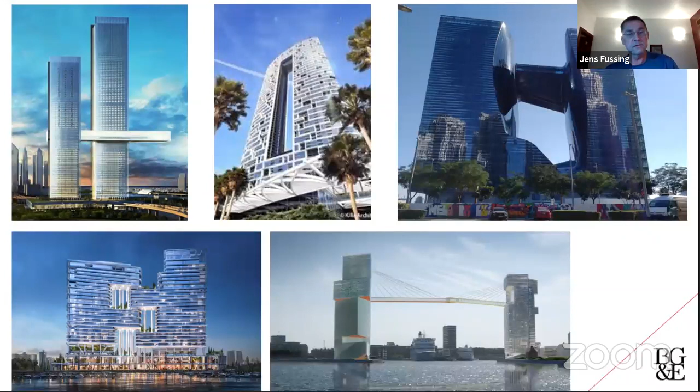So these columns here are 30 meters tall, and in the beginning they were like 500 millimeters thick, so of course that didn't work either. We'll come back to that.

So let's see what the usage actually is. Now we see it from the other side. The taller portion is the hotel apartment, and the lower portion is the hotel section of the tower. If you notice, the floor plates do not line up - the floor plate in one building does not line up with the floor plate in the other building, only at this level here at the roof.

Underneath here there's two common basements, and we have all the common podium structure in the bottom. There's a ballroom over here, and you can see that one, two columns are transferred out - we'll come back to that in a minute and why that is. Then up top here you have a pool and a sky bar.

But one thing which was important for the architect was these three things, which were very holy: the voids and the way the voids look and why they were there - we'll come back to that with some photos later on - the columns being expressed, and then also the facades, the way they look, are designed, and the way they shade. Those three things were extremely important to understand what was going on architecturally.

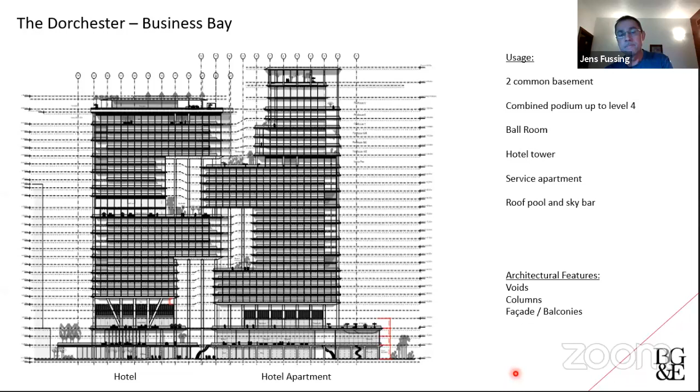So if we just look at it, the hotel apartment is 136 meters tall, and the hotel itself is 125 meters tall. So that's the proportions of the whole building. And the few transfers which are there are done with V-shaped columns and raking columns like that, and we'll come back to that also - there's a few slides on how we did that.

So this one here is the layout of the building. You can see that it has a kink - it follows around the same shape as the harbor front.

If we look over here, you can see the ballroom. And if you follow the tower footprint, you'll see that - oops - where are these two columns? They're gone. And then of course the floor plate goes back, the footprint goes back here again. This is one of the extreme challenges, to move two columns in the bottom of a tower footprint.

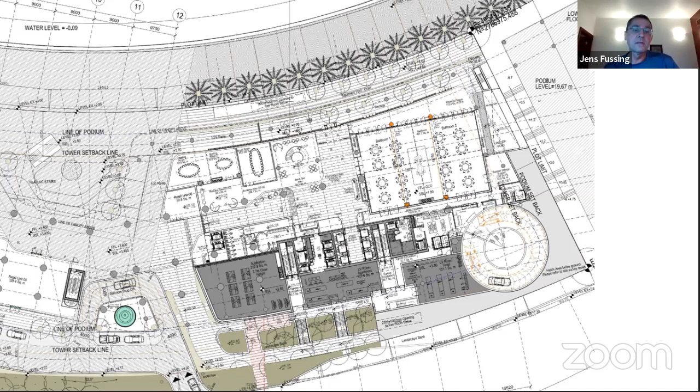And then if we go back a little to the middle here, again an architectural and structural challenge is that you have drop-off zones. All these columns here go straight from foundation to top - they cannot be touched. It's holy, it's... what should we say... it's an architectural impression which has to be maintained like that.

This little stairwell, we'll come back to that also, why it is there. Architecturally, it's in the way. Structurally, it's extremely good to have it here. Again, you can see the footprint of all these round columns - those are the footprint of the tower itself.

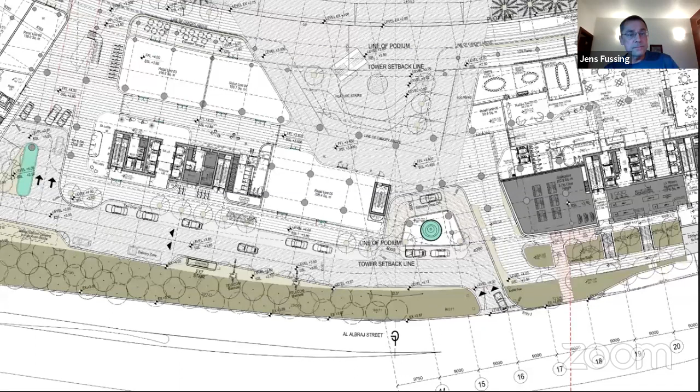Let's go back again. So those are sort of the challenges we can say. How do you make sure that all these columns can go all the way up and only sit in the division between the hotel rooms when you have a shape like this, with all these things going on here in the bottom - drop off from one side, drop off from the other side, a stairwell here, a ballroom over here. These are sort of the extreme challenges we have.

But you can also see how open it actually is here for wind to flow through. There's a lot of openness in all this building here in the bottom. This is actually tower columns you have over here, so wind can actually flow through all this area. And as I said, we'll come back to that. The building itself has a funnel shape. This is the predominant wind direction because the Gulf is out that way, and that's where the strong winds come.

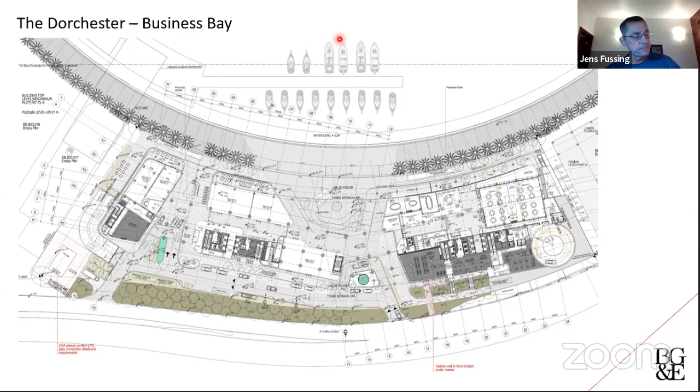If we look a bit at the architectural floor plans, this is just one of them. Here you can see this is one void, and then you have columns in the middle, and it's all rounded, so we have nice round edges in the voids.

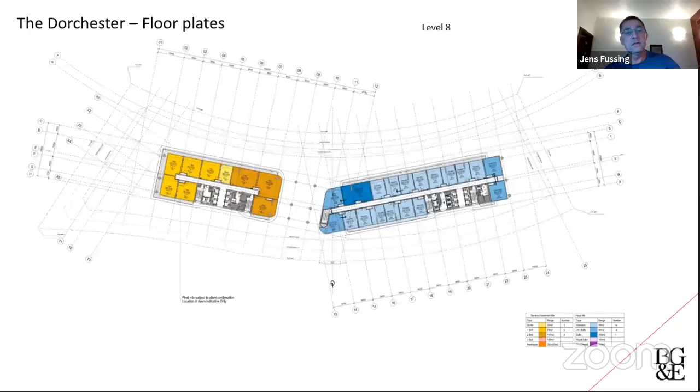But it's of course a huge puzzle, because when you look at how everything is laid out in the beginning, there are requirements for room sizes, requirements for how many rooms you're going to have, and all the columns need to line up. That's the puzzle. You can see how it shifts the other way around, so now we have the void on the other side of the building, and still the same columns must go straight up and down. It's not like a sky bridge, it is like a building, but with no facades where we have the voids. That's the way it should be looked at.

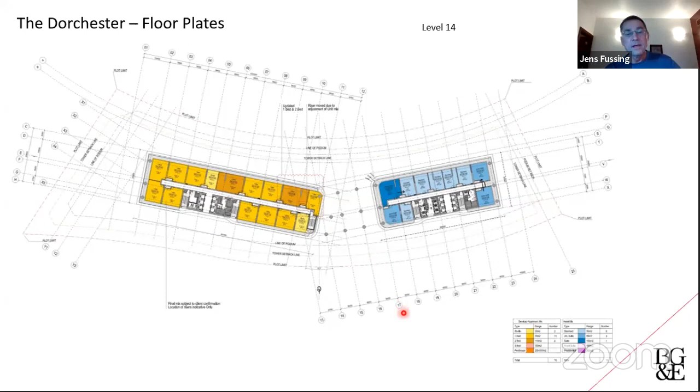And of course, in the beginning of the concept, the cores are not that big. The cores are smaller, and they grow and they grow until you find all the right stairwell sizes, MEP, elevator number, all that stuff. So that's part of the process.

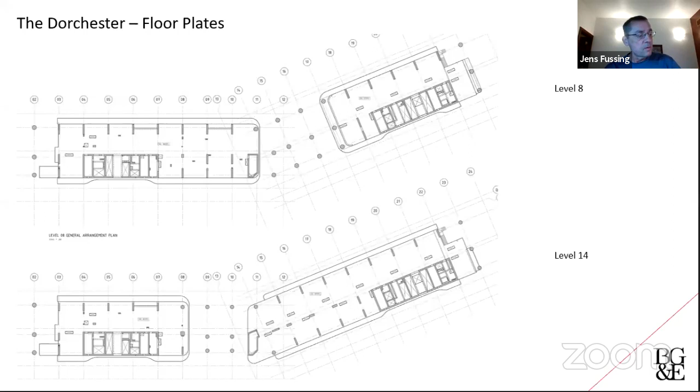I'll just touch a bit on these facades. Originally, Foster and Partners wanted to do these facades and balconies prefabricated, and I agree with that opinion completely, and I'll come back to why. If you look at it, you have fins which are all the same, balconies which are all the same, facades which are all the same. An insane amount of repetition factor. So much industrialization is in this view here.

But no. When decisions are run by commercial people and not builders - when I say commercial people, I mean UAE builders - they wanted to do it traditionally, where they cast the slab out, put insulation, put membrane, clad all that stuff, and then erect your facade, and then put your balustrade on afterwards.

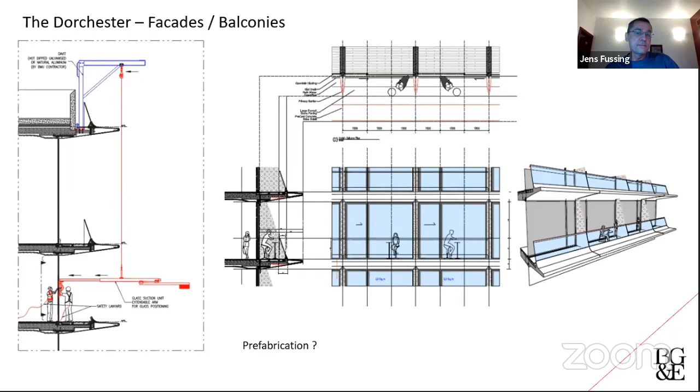I just want to show some ideas. I mean, the wheel is invented already, right? You have systems where you have fully thermal broken facade and balcony systems, where you can make a balcony which is even more slim because it doesn't have all that bulk, since now you need to build in membranes and insulation and all that stuff. The wheel is already invented. It's out there, it's not rocket science.

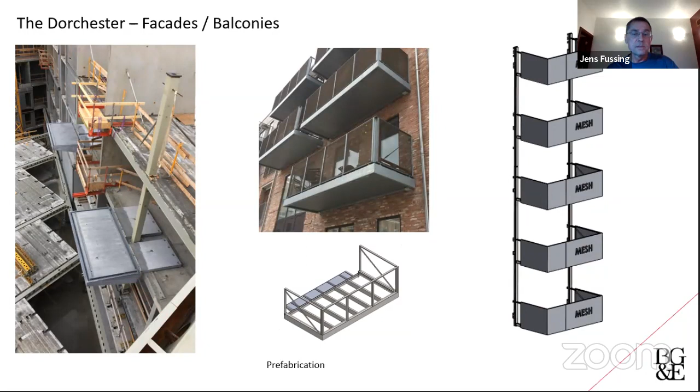This is from North Europe, and it's a fully thermal broken type of balcony system. Here's some other systems where you can see the brackets are ready to receive the balconies, and here there's also a thermal break behind. When these balconies are erected afterwards, there's no membranes, there's no insulation - that whole work process, you don't need to do it. Whereas the one we have chosen now is very slow to build.

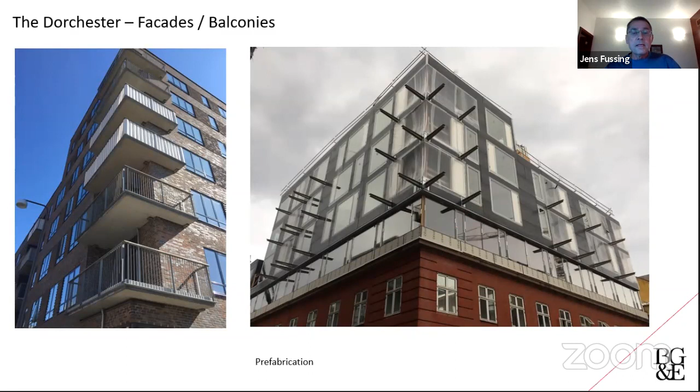So I want to keep touching on this. This is a project we've been involved with for the last 3 years, where we've been helping a developer in Denmark, together with BIG, to develop a tower project which goes from 20 meters up to 100 meters. It's mostly the structure, but also the facades and the balconies.

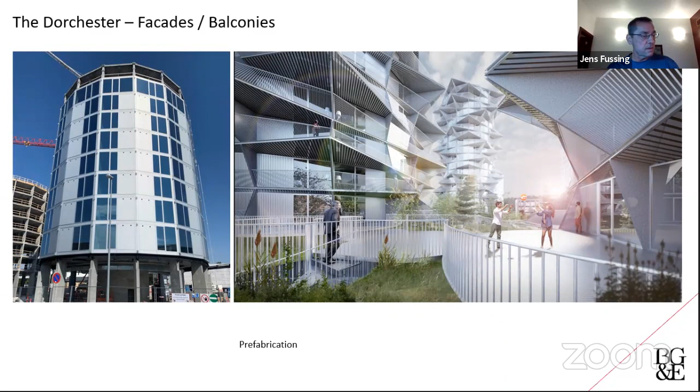The way it should have been done: you have a structural system, then your curtain wall, then your balconies afterwards. That's how it should have been done. And of course, no thermal bridges either. When people tell me something is impossible, look here - what are they saying, is it not impossible? Possible.

You have the same thing here - the fins, which we had on the Fosters, and a raking balustrade. All of that is done here. On these towers we only have 4 different types of balconies. Each facade takes 2 days to erect - there's 16 numbers, it takes 2 days. Each balcony takes 2 days to erect per floor.

If you look at it out there right now, it takes an insane amount of time because you have cast-in steel, post-tension slabs. You must put insulation, membrane, your GRC cladding, then put your facade in from outside with a counterweight, then put your GRC on your balustrade, and so on, and put the lights.

So we still have a lot of improvement to do here in UAE, and this is why it's fun to do these talks, because it's always about going back and forth. The structural system on these towers is actually ideas I have from here, from Dubai. So it's always fun when you can mix these ideas.

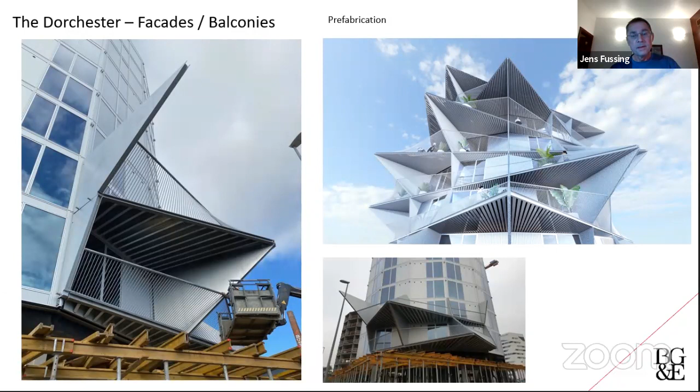But to me, this project and the Dorchester project I'm showing here have so many similarities when it comes to facades and balconies. And the wheel is invented - we don't have to build slow anymore when we do balconies and continue the floor plates out.

Okay, now to the fun part, all the structures. This is not to be sarcastic, but I call it the Bumble Bee because it shouldn't fly. Of course you can always make a building fly, but it's meant in a positive way, because we have challenged so many engineering principles on this tower, first principles. For example, the structural system is a hybrid system.

We'll come back to that. First of all, the floor plates do not line up. Usually with diaphragms we'd like the floor plates to meet each other at some locations - no, they don't do that here. The hotel rooms have a column grid of 9 by 11 meters. We like to have 8 by 8 because then we can go down to a 200 to 220 millimeter PT slab. But 9 by 11 makes it chunky. It's the first principles which has a cost.

The two towers are linked with a stairwell in the middle here - I'll come back and talk a lot about that one. So the only thing making these two towers connect with each other is the stairwell in the middle, which creates the diaphragm action between the two towers. Have you ever seen that before?

The cores are eccentric - we don't like eccentric cores, right? We want a lot of gravity load on the cores. The columns change shape up through the building, from round to blade and back to round. There are huge transfers at the bottom of the tower, where we transfer 2 columns out. Why could that ballroom not have been shifted out 10 meters and avoided all that?

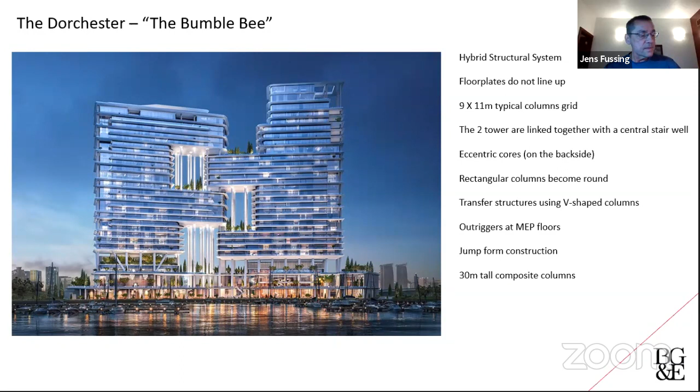So yeah, I'll just very quickly here, you can see how the cores are eccentric. If you drive on the Al Khail side, you can see the back side of the core. And of course, the reason why the cores are eccentric is because everything is about the views. There's nothing to view that way, other than the desert. So they want all the people to live in front of the bay so they can view the bay and Burj Khalifa.

This one is the stairwell in the middle linking the two bridges together, two buildings together. But I'll come back to that one. You can also see here the round column becoming a blade column, becoming a round column up through the building, and they're all over each other, all the way up to the top, because that was the architectural intent from the beginning. You can also notice that the way that corner column is taken out is actually a transfer the other way. So there's transfers in two directions over this ballroom here.

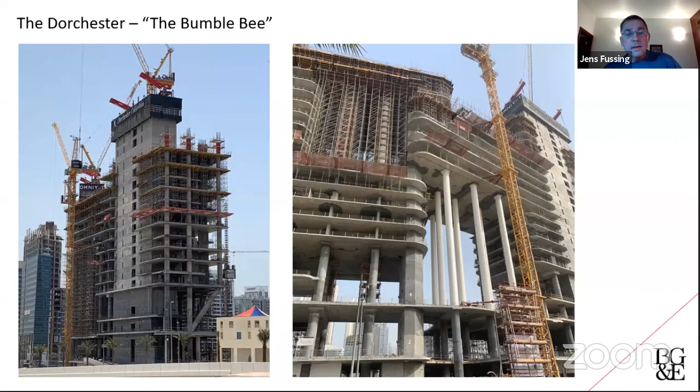If we then just look quickly here at the structural system itself, it's the usual Dubai method that we take everything which is there structurally, and it will work for lateral stability. So in this case here, it's of course the core wall system with link beams and frame action between floors and cores and columns. And we also have some outrigger levels up through the building.

I'll come back to that one in a little while. So yeah, and again, the floor plates do not line up, but it's still one building, everything. We were also discussing about that in the beginning, if we should make some expansion joints and make a little steel bridge, which is just resting on the other one. But that was shot down because of this column theme of the whole building.

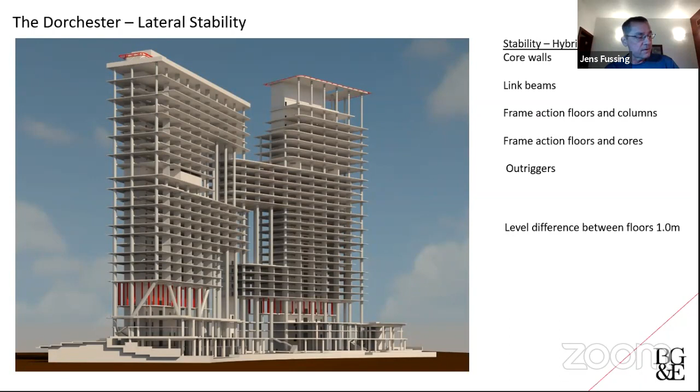So if we look at it from a modeling point of view, or more sophisticated here, this is how it is. I mean, the cores and the columns and the beams and the floor plates and the beams and the link beams in the core walls itself.

Of course, we've done many ETABS models before we found out how it worked. Just a few, again, one of these funny things where you can see how the floor plates, they change from void to void. So this is a void down at 11.7, and this is another void higher up through the building. But again, that column sits on that column, as we come further down.

So all the time, cost consultant will come and ask me, what can we do to save on concrete? Yeah, you can shorten the span, that's what you can do about that. I don't have a magic wand how to get over that.

So it's about getting, if you want cost, if the cores were also not that long. But surprisingly, when we came through the final versions here, actually the two first mode shapes are in the Y direction. The third is in the X direction, and torsion is actually the fourth mode shape. So this is totally a textbook example, but it's just against one's intuition, because you feel like it should be a little bit more susceptible for torsion. I thought it was going to be torsion which was going to dominate this building here, but it wasn't. So that's always one of these fun things when you sit and compare your initial thoughts.

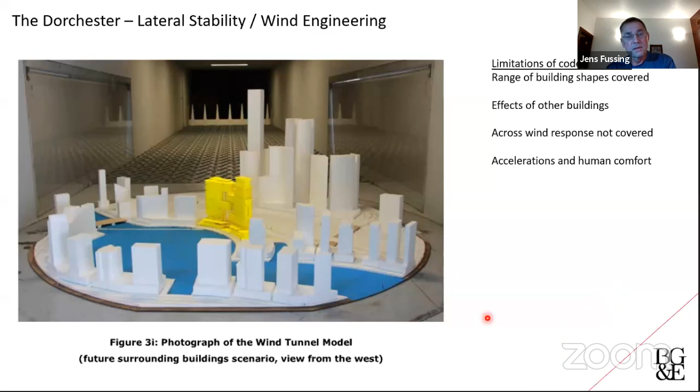So of course we did everything. I mean, the normal wind tunnel study with loads and zone mapping for the facades, and also the accelerations and local wind environment, all that stuff was part of the wind engineering package. And the way the wind loads were reported was in 3 different coordinates, which we then could enter into ETABS afterwards, for 36 different wind directions.

If you remember your wind engineering from first principles, you'll remember that if you have a straight up and down building, the upper third of the wind will fly over and around the top. The other two-thirds will have to go down to the bottom where it becomes turbulence and has to crawl all the way around the building. But because we've opened up so much area here in the bottom, up through the building, and rounded the corners...

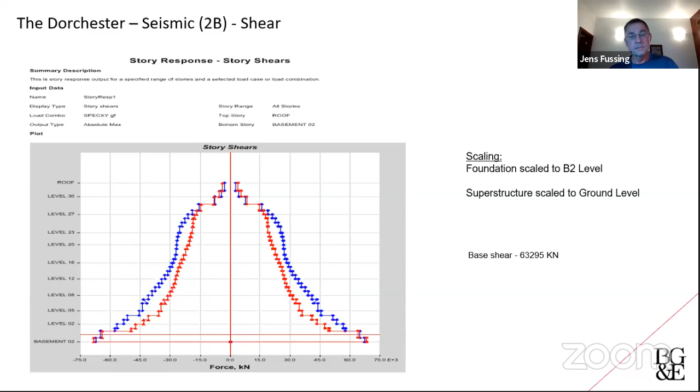If you look at the seismic, there are tons of slides, but the overturning moment is enormous. And if we take a look at the drifts, they also still comply with code requirements.

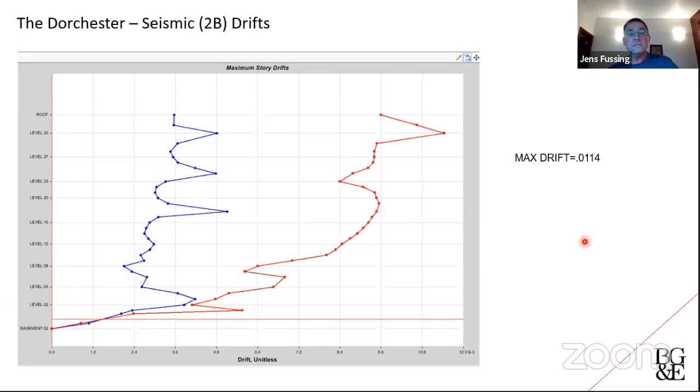Now I'll shift the subject a little bit. Sorry, not yet - next time.

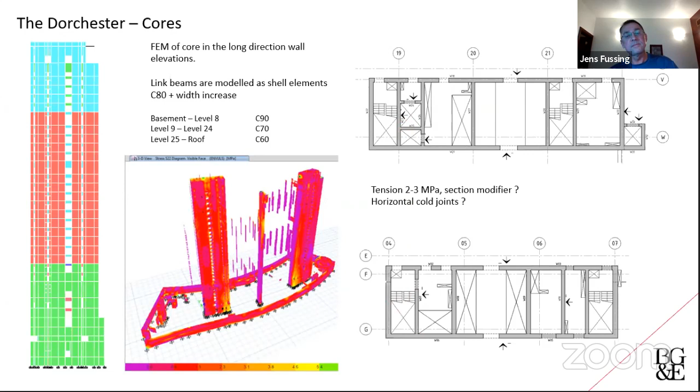Reflecting on this, when I come back to the previous models, to how it is now, and the torsion - if you imagine you have two buildings with two different frequencies, of course now it has to have one frequency, but you can imagine there are some internal forces trying to go each other's way. The only explanation I can find for why it is like this is because the core walls are so long in the long direction, so it's actually very, very stiff in the long direction because of the core walls - they are also so long. Because this looks scary, right? You think about one slab going one direction, one slab going the other direction, what's going to happen right here? But it was actually just, when we designed these core walls straight out of ETABS, there were no surprises at all.

A few - so where the core is visible, it has this shape here. And at the floors, if you imagine you come up to the stair and then you have a corridor down here to the hotel room, there was a little bit of reconfiguration of the stairs in this area here.

So why is this one here important? There's two interesting things. First of all, it acts as a link between the two buildings structurally. But if you notice the drawing before where we had the drop-off zone, Foster and Partners actually wanted to transfer this core wall out at level 4 and say it stops there, doesn't go down to Mother Earth. And DM, or Civil Defense, I don't know who it was, would not allow it. So structurally, of course, it's logical that it has to go down to the raft, and it's good because it just makes sense.

They actually wanted to transfer it out. It's not impossible to transfer it out, you can do it. But the reason why it looks like it does is that there was a stairwell here, and DM said all stairwells must be concrete and go down in one straight line to the raft and up to the roof. That's why it looks as it does. As a structural engineer, I'm happy we have this one because it ties the whole thing together, and it would also be a nightmare to transfer that out.

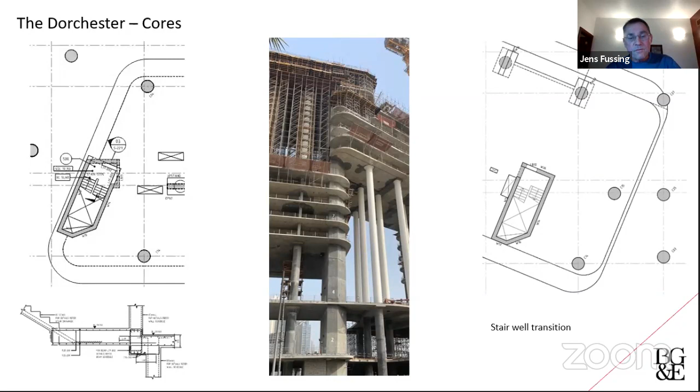If we take a look at the columns, this is one of the views, this is the hotel side, where you have the ballroom underneath these raking columns. If you look at the ETABS model, you can see that the columns' center lines line up until they meet a frame element.

This, of course, is an architectural nightmare because an architect would like all the front faces to be out at the facade line. The reason for this was that DM said an offset in a center line is a transfer structure, and DM would only allow one transfer in one load path. So you cannot have a transfer on a transfer on a transfer. They would not allow that.

For example, if we take a look at that level here, it's okay. Here we could play around, so they would allow one level where we cut off and move the column faces out to the facade, but the rest has to go straight up. So first we had to make sure all the columns were in the right location with the ballroom and the drop-off level, but then we'd also have to look at it in the building in that direction afterwards.

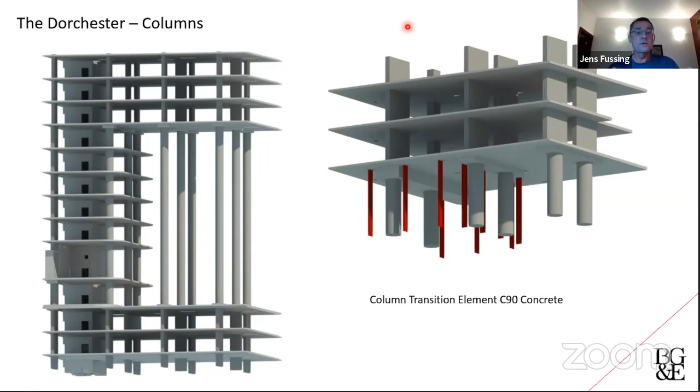Back in the day when we were doing a lot of projects in Index and residences and around here, imagine you have one blade column and another blade column on top, so two blade columns, but they change direction. You can make a transition element or a huge core, call it whatever you want. The way we convinced DM to do these transitions was that every time we have a change between a blade and a round shape, we introduce these transition elements.

You can see them here, to catch the load from one geometrical size into another. You can also see them here. We'll also show some photos now. So the agreement was that center lines must line up until the first time you have a transfer, and every time you have either a transfer or a geometrical change, we have a transition element. That was sort of the agreement, and why the building looks as it does right now.

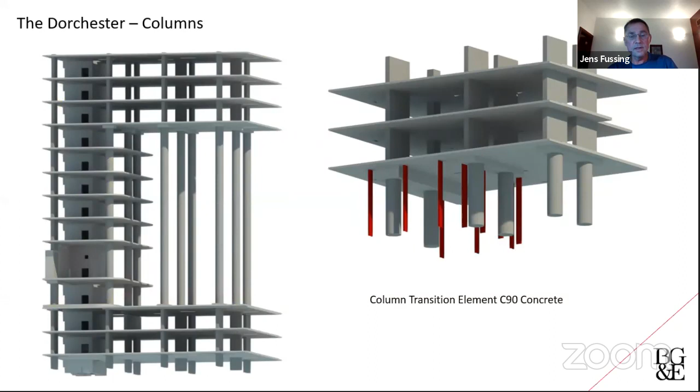For example, one transition element, you see this one here: the round blade column sits perfectly clean over the blade column underneath, and there's a transition element which makes sure all the forces get from one geometrical size into the next. On this plan here, this is another case where the columns are shifted out, so the outer face of the circular column matches with the blade, and that's now a transfer structure. All of these transfer elements, transition elements, all have an omega factor on top of that. And because we have high strength columns, the transition element is the same concrete strength as the column.

And an omega factor on everything. There's a lot of checks you have to do for these. You have to check the bearings as a simplified strut and tie model. We have to do the mushrooming, which is the concrete strength, and of course the omega factor. So that's the agreement we had with both third-party review and also DM.

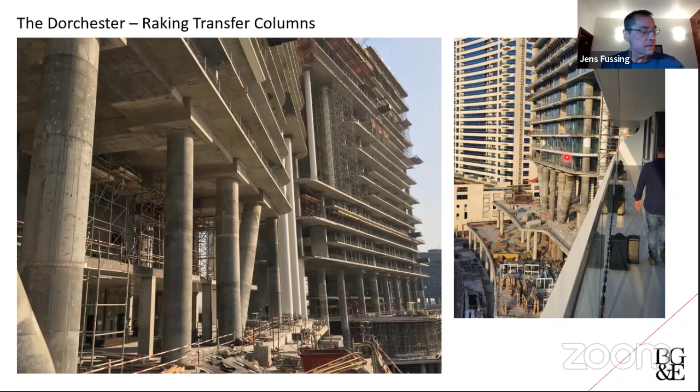Here you actually have a bit of the facade being constructed. I think this is the trial room or whatever they call it. And then we've also been through the construction sequence analysis, and it does have a little stomach there in the middle, trying to bend a little bit out, which is also as it should be.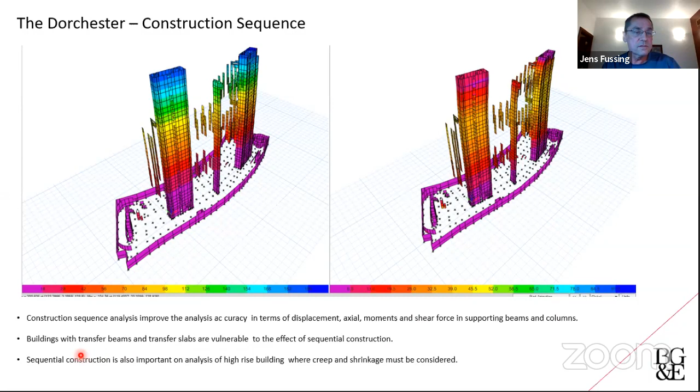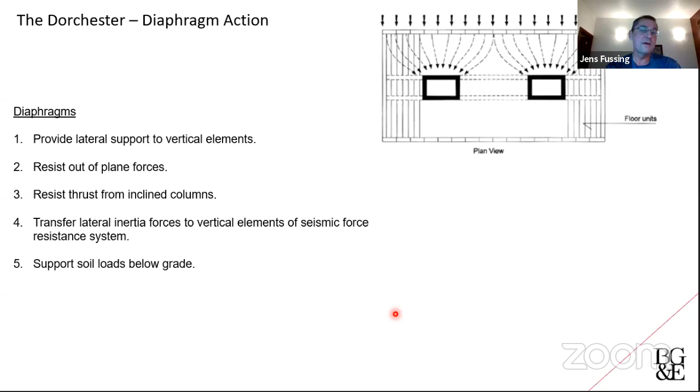I just want to touch a little bit. The last topic here is about diaphragm action, and I think one of the big learnings here is that it's logical that when you have columns which are raking, for example, that you will have forces in your diaphragm. So when you sit with your first principles and you design these things, you know that.

But the thing is, how do you practically design with the tools we have today? How do you remember to take into account all these forces here? Because usually a lot of these floors will be done by a PT designer. So the PT software and SAFE does not know how to take into account the lateral loads. So it's all about establishing all those principles about who designs the diaphragm action, who designs the ties.

It's a little bit the same as when we have temperature and gravity loads. I mean, who tells the PT designer what extra reinforcement is to be put where, and that's where you really need to concentrate to find out, because some of these forces are very, very big, and it seems counterintuitive that you have tension forces and then you have a PT slab afterwards.

I mean, so you really need to think about what happens in diaphragm action when you have raking columns, and how do you tie the forces back to the superstructure. So anyway, this is just one of the learnings and findings, that there can be some very, very significant loads which can occur there.

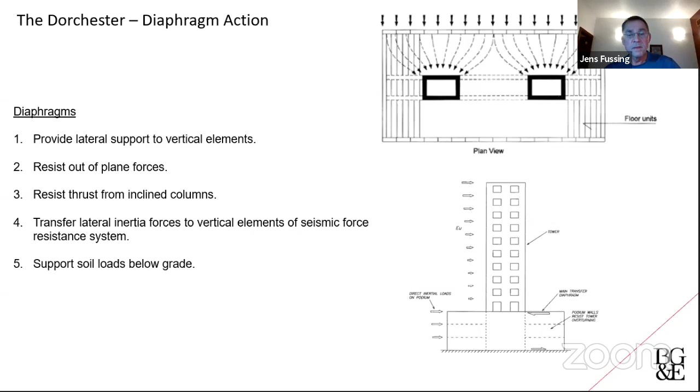So January 2020, when everything before the Corona crisis, there was going to be all these seminars and CTBUH and whatever. I actually submitted this project here, and the one I showed you before with these balconies, I submitted those to CTBUH, to the one in Singapore, as possible presentations. And they came back to me and said both of the projects were too ordinary, they were too boring.

And afterwards, they have changed their mind, because now the whole Corona crisis has turned the world upside down. So they have asked us to write an article about the one I showed before with the building system, the facade and the balconies, and that will actually come in one of the next CTBUH journals. It's a 4,000 word article with pictures and illustrations.

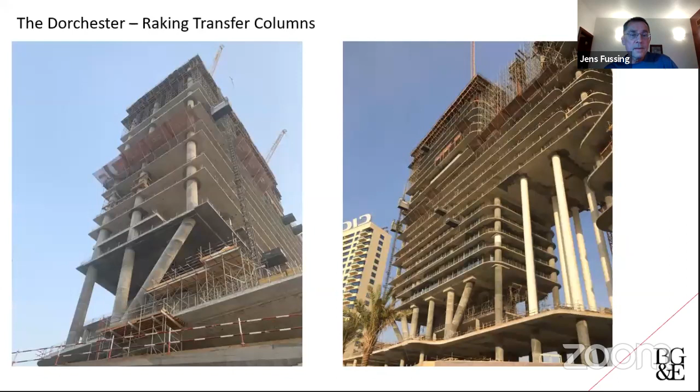Yes, I'll just find that. Just a minute. So the way it works is that, see, this is the one. For example, here, this is a blade column sitting on a round column. So here you have a rectangular shape, and here you have a round shape. So that means, it's like a two-dimensional truss which you need to generate from one shape to the other shape.

And you can do that manually, and find out what happens. But usually you can also compare it, if you did that upside down, then you can compare it to a corbel, right? So you'll get tension in this bottom layer here, because you're trying to squeeze out one geometrical shape into another shape. So the primitive answer is it's just like a corbel, but it's in two dimensions and it's from blades to round, right? So if you imagine you have two blades, it's a lot easier to say, okay, how do I get those forces from one shape to the other? But because it's round, you have to model that to see how the forces come around. And then you have the thing with the bearing, and when you start looking at bearing you have this A1 and A2 stuff and all that, and get into all these things. But the philosophy is that you need to draw a line from here out to there, all the way around, and see how that cone shapes, whether there is enough compression strength, and what outer forces do we then get because of that.

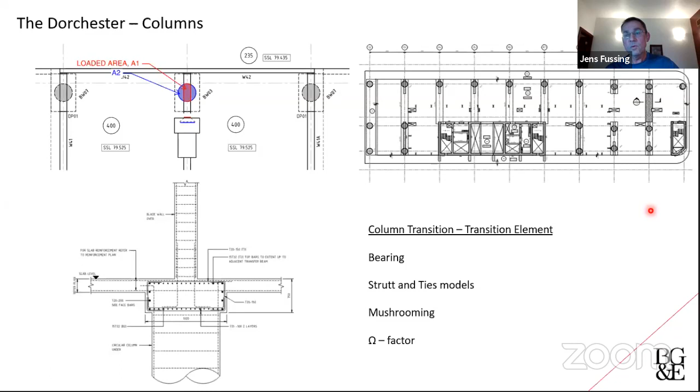It's a bit of a long question, but I'll put it short. A question from Krishna Prasad Menon, most probably from Kuwait: in the first instance, you thought it was a torsional mode, but it's not. What is your thought about that?

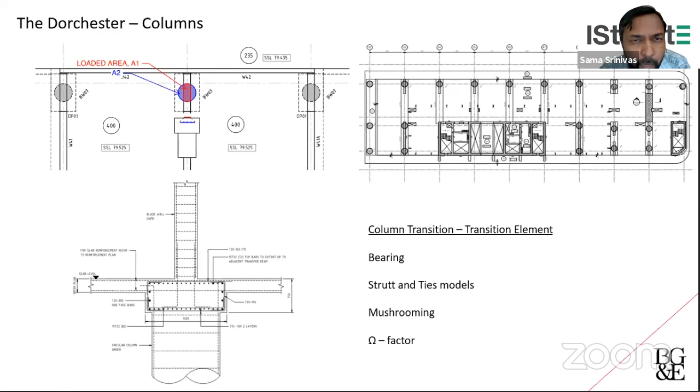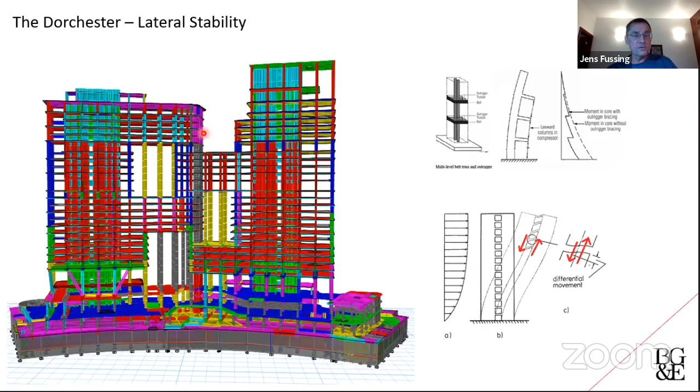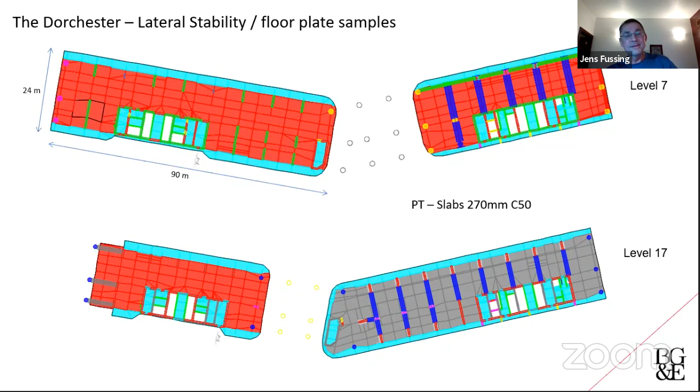This is because in the beginning I'm also mixing up the mode shapes - the first two are Y, X, and the last is torsion. When you look at the building intuitively, it looks very weak, so you think torsion will govern. I thought it would be torsion, but the reason it's not is because these cores are so long - it's a very, very long core wall. I don't know what the aspect ratio is, but it is very, very stiff in these directions. I was also surprised that torsion was not governing in the end. Good question - you have a big core, as you said, correct.

I don't think there's anything with load path, but here's the thing - if we look at this one here, when it comes to the cost consultant, the cost consultant is right. It's possible to squeeze this, it's a pragmatic view, so the cost consultant is correct. This is the optimum size of concrete and reinforcement, and he can take his spreadsheet to his boss and say he has optimized this substructure. But to me that is called sub-optimization. He's forgetting the big picture, because if you sub-optimize concrete and hurt processes, blinding levels, backfilling, waterproofing, risk and time, and you're not able to offset that, are you then a good cost consultant?

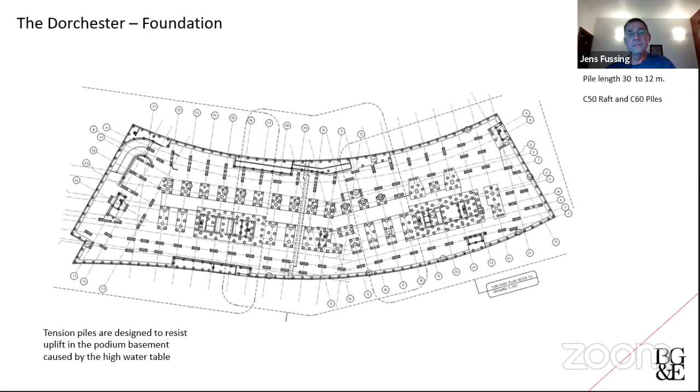It's the same thing with outriggers - it's a principal discussion. Sub-optimization always has a bad effect on other trades. That was my point. So it's actually the other way around - he has saved money here if you only look at concrete and reinforcement, yes he's correct, he optimized it. But I don't agree with that way of thinking from a big picture perspective.

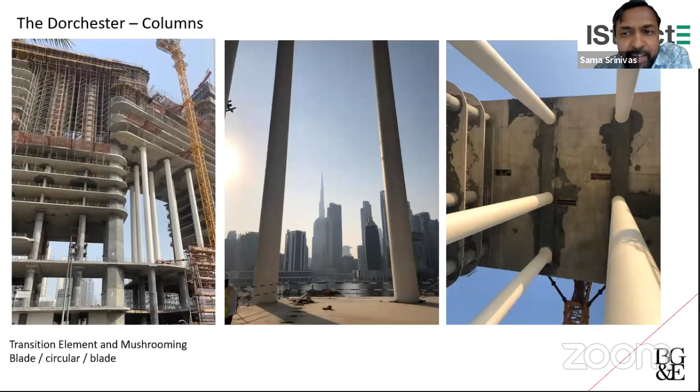I think there's a question from Sir Raghav Sharma: at the raking column locations, you have provided steel reinforcement to compensate the tension. What about the plane buckling of the slabs at the last bay due to high compression?

Oh yeah, all that sequential stuff is also analyzed. There are some huge - I did show that, didn't I? We have a sequential construction model also. So in the end, all the load combinations being designed for are sequential construction load cases. So all of those differential settlements, column shortening, long-term creep - all that stuff is in these load combinations. I don't know what the exact number was, but it is taken into account.

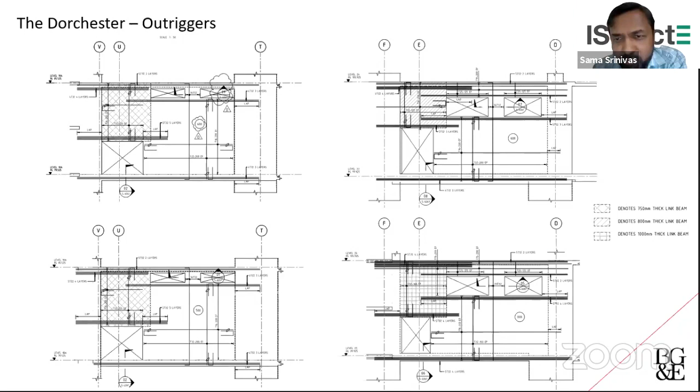A question from Inbad from Singapore: what was the percentage of column stiffness taken in the PT floor design? I'm not sure what the question is - I'm not clear actually, what was the percentage of column stiffness taken in the PT floor design?

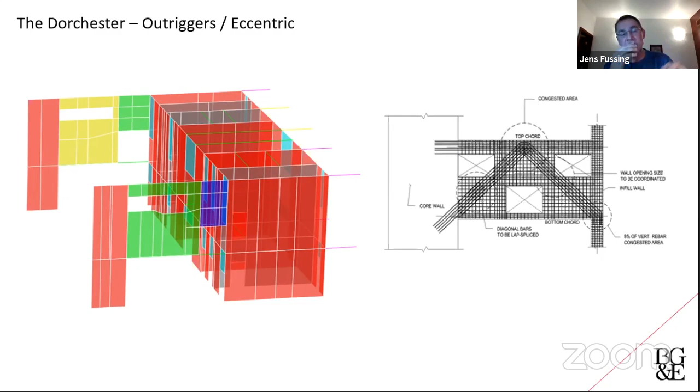The column stiffness is in the ultimate model. We use the usual 0.7. Anything maybe because of high horizontal forces, did you consider more or less? We did some - in another presentation we found out how much of the lateral force is obtained by the traditional framing versus how much is taken by the core. I can't remember the percentage, but it's probably what he's referring to.

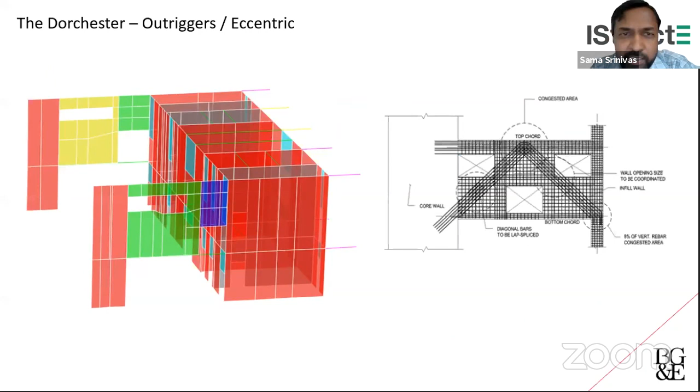We'll take another 2 to 3 questions. There's a question from Mohammed Ushari Kumaral Effendi Mohammed Yusuf: What is the highest grade of concrete used in the project, and how did you control the temperature?

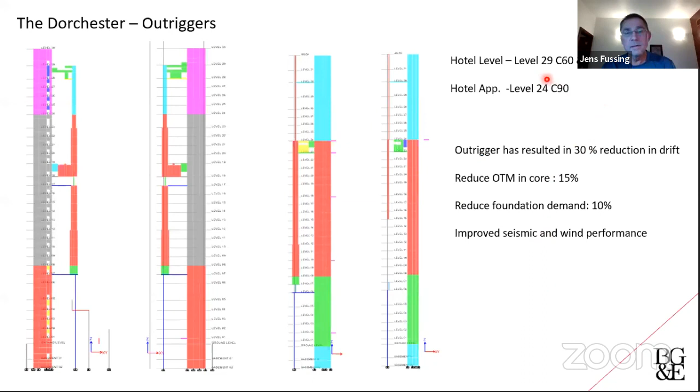This is Concrete 90, the highest grade. You can see it here. So this is cube strength - you have to multiply it by 0.75, as a rule of thumb, to get it into cylinder strength. So all the concrete strength I've shown here is cube.

And we didn't do anything special about temperature. The only thing is that for the raft, of course, you use GGBS to try to extend the curing time. Constructing with this type of concrete strength is common practice in Dubai - nothing specially done, just normal standard procedures for casting.

What is the possibility of using GFRP reinforcement in the raft to avoid congestion of reinforcement? It's a bit different question, from Mr. Mohammed Izzat. Maybe he's thinking about high strength rebar.

I don't think it's that popular here in UAE, but elsewhere around the world there are mixes where you can replace some conventional reinforcement with fibers - not for strength, but for crack width and durability. For example, in my home country it's used in many places, especially in substructures, simply to save on labor and reinforcement, and it also gives better durability. So it's not popular here - I don't know why, but that's true.

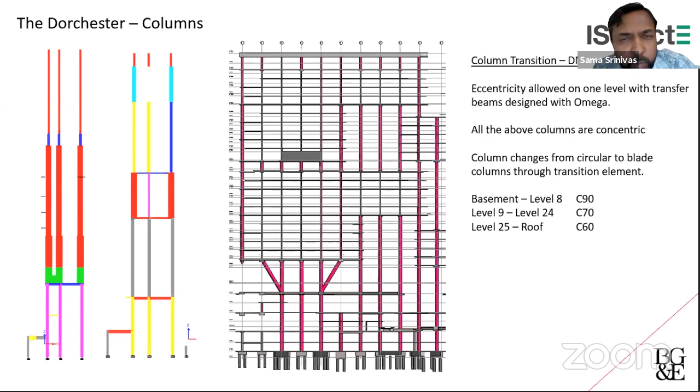Another question from Mr. Callum: How did you cast the 30-meter length columns? What is the construction sequence to avoid segregating the concrete, etc.?

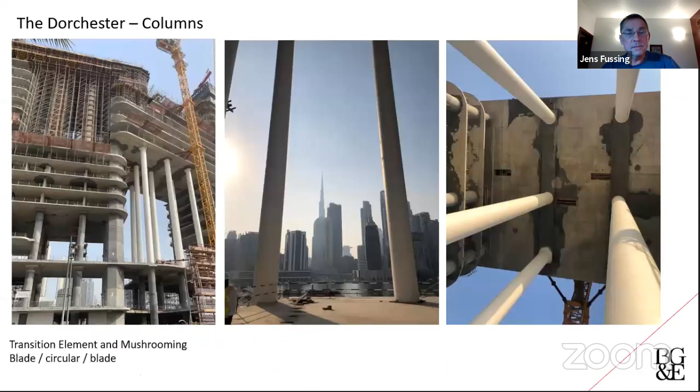Each section, each tube, is about 4 to 5 meters long. There you can see the horizontal line - that's where they are welded. You come with one tube, place it on the other, with bars sticking up into the other tube. It's already cast up to here, and then you put your reinforcement cage inside. So you only cast 4 to 5 meters per sequence.

That's purely down to buildability - how do you construct a column like this? So it's not like 30 meters is cast in one go. Even 4 to 5 meters is too high, I believe.

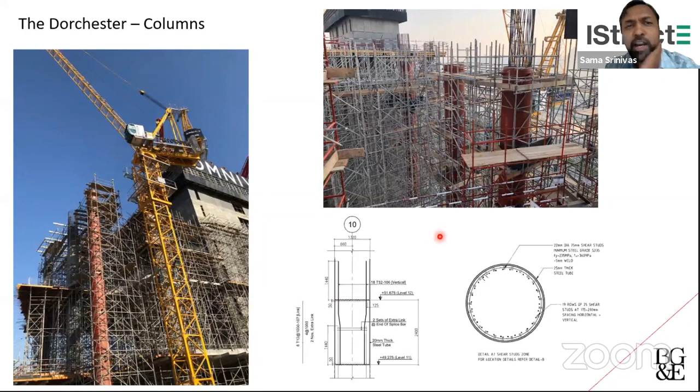Maybe it was 3 or 4 meters, something like that - you can actually go and see it. But this is purely about constructability, just to go up there. As soon as that's done and welded, it is stable, and you can build your scaffolding around it as you go up.

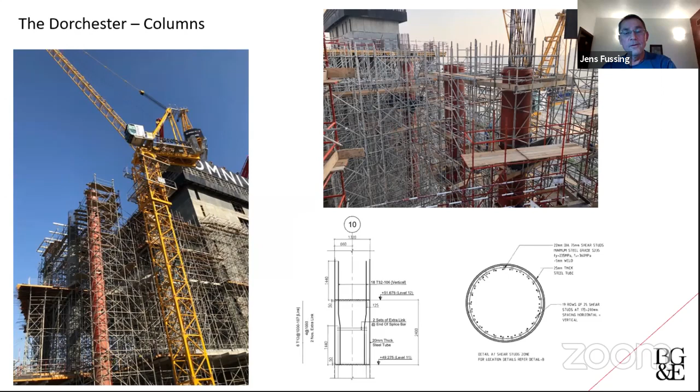Another question, from Singapore, Mr. Inbad: How did you prevent disproportionate collapse in the areas near raking columns? Yes, this is really one of my topics - I can talk about that for 15 hours. And because we didn't...

My philosophy is that, for example, when I was making fun about these columns and fire before - to me, the right way would be to make a performance-based fire study here. Is it actually possible that if you have a fire in an open void, you can even get up to 3 hours?

I don't believe that a sofa burning in here can burn for 3 hours. I simply don't believe it. So that's one thing - there should be a performance-based fire engineering assessment.

And I know why it's not - it's because we're using ACI and UBC today, and ACI and UBC have a lot of inbuilt robustness thoughts. Why do we have this continuity? All those things. But it's not like, for example, the Eurocodes, where it says buildings more than 15 meters must have an alternative load path if something collapses. Straightforward - now you know what to do. You can't find that in the DM code, you can't find that in the ACI code. And then you can ask, should we as engineers impose this on the building? That we can discuss elsewhere.

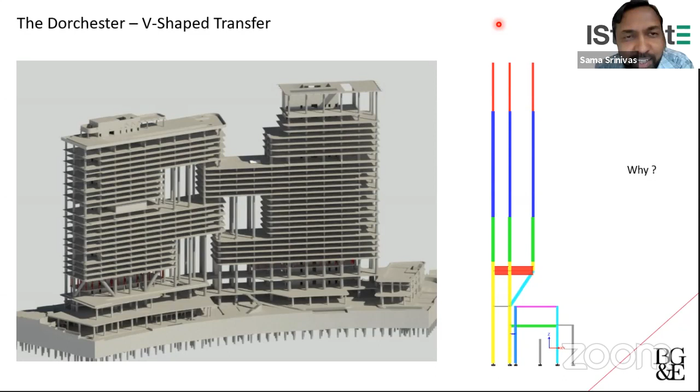If you use a K-shaped steel structure, maybe it's more economical instead of a concrete wall, maybe it'll have an effect on drift, you know. Say that again - I didn't get it. No, one of your comments in the presentation, you mentioned if it had been a steel structure, it would have been economical. This is what I'm saying - I don't think this is the right way to do an outrigger in this case here. Yeah, maybe if you change to steel, maybe drift could be a problem. That's his thought - what do you think about that? Maybe it will be more costly or what?

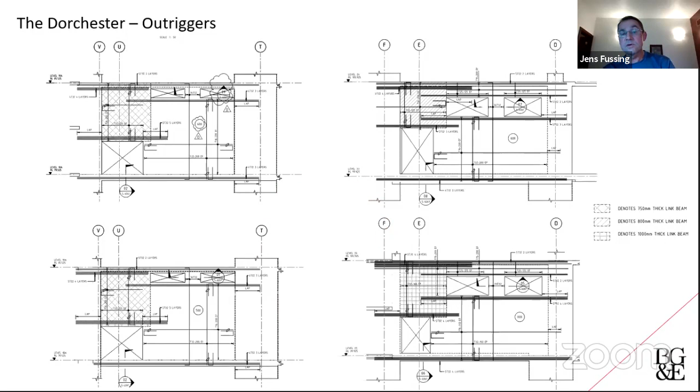Yeah, if you propose - this is exactly the same example as the foundations, right? In the spreadsheet it probably looks cheaper to do in concrete than steel, but all the associated things and checks, I don't know what happens here. This takes forever. If you look at these reinforcement drawings, how horrible all this is, and we have to do flanges in the slabs afterwards. The amount of time to coordinate this, and also the coordination - if this had been a K-frame, bang, bang, all that area is up to the MEP. Yeah, that's true, no doubt about that - steel is definitely better, yes.

And we've got a different trade basically. Yeah. Because in this part of the world, people think concrete is the best solution, you know, for everything. Yeah, it's because it says so in the spreadsheet.

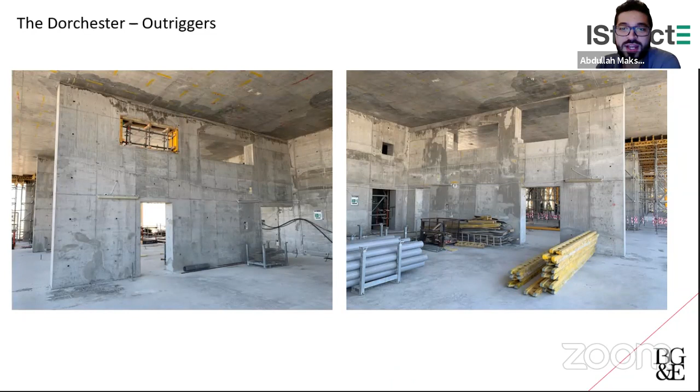Question about the incline transfer columns - I could not see any tie member at the top floor levels. Is the slab taking the tie forces from the incline columns? And the completion of the question: has this been designed for omega of 2.8?

Yeah, so this is the plan. All this slab here is designed with the omega factor. So underneath here, underneath this column here, that's where we have a raking column going backwards.

Underneath this column here, that's where we have a raking column going backwards. We also have it down here, but that's because of symmetry, so it looks the same. So of course, when you have a raking column that way and a raking column that way, that's why we have these huge tie beams here.

I can just go one slide back. See how big it is. So all of these tie beams here are actually the ones framing up all these forces. So to take care of these forces acting at this level and here, that's what these tie beams are doing, bringing them back into the core. This is what I'm saying.

In our first design, we actually had a horizontal steel truss sitting here, embedded into the concrete, doing exactly that, bringing the forces from these inclined columns back into the core. But now we've converted into these tie beams here. So that's how it's taken care of.

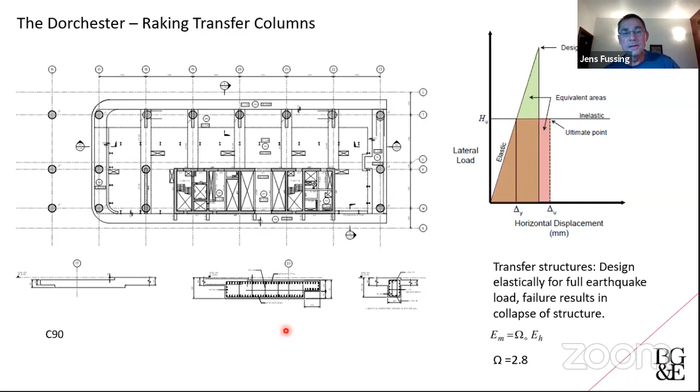One more question. Yeah, it will be the last one because we still have 3-4 minutes to go.

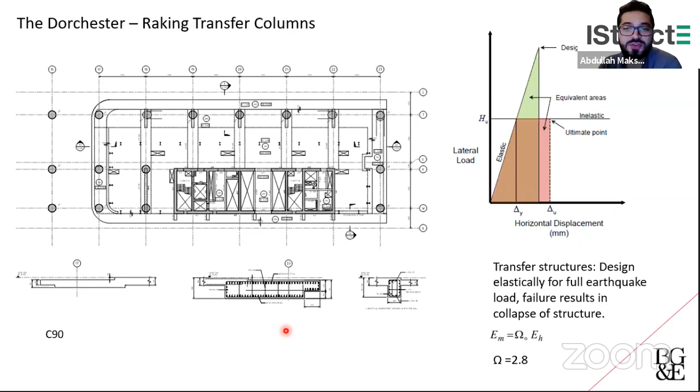The question says sum of mass participation for the first 2 modes is more than 100%. Maybe 2 parts are behaving differently in the same model. Can you please explain? That I don't know.

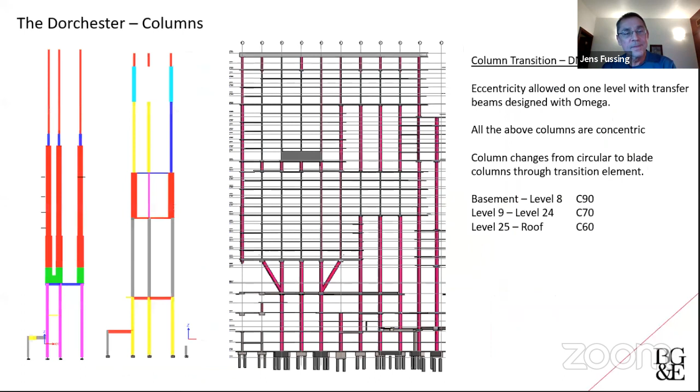The point is, that was not the point. The point was that it was torsion which was not governing, which intuitively you would think, right? What was that one?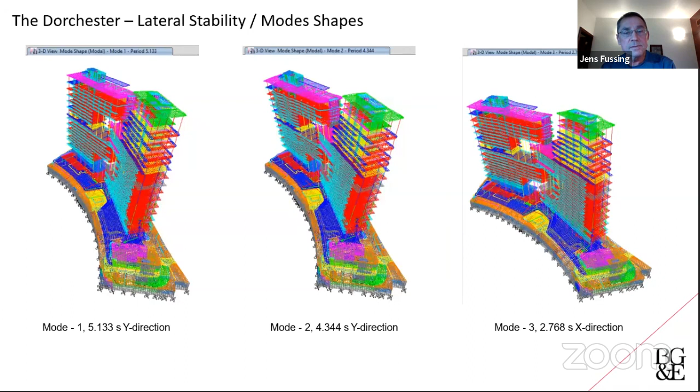Because I also have another model where it was 3, where it was... what is that? Yep, yeah, okay, that's a little bit here. But anyway, the point is that it's not the first. The torsion is not the first mode shape, which you just feel it should be, right, when you see it. That's sort of the fun engineering part of this, I think.

Yeah, Abdullah? I think that's it for now. Like otherwise, everyone else is saying it's a great presentation. I think we have 2 minutes, I'll take one more question, last question.

I know this building is very complex. You must have spent good design man hours. So how much time did the client allow you to design this project? You got a... it was quite far.

As I said, this is 5.5 years ago when I came. This was on my table, right? And you can see how far we are right now. It's still under construction. And by doing this presentation here, I was looking through the number of revisions.

It's like 18 revisions, because if you imagine that, first you do a concept, and in the design phase, when the operator gets appointed, the operator will have opinions about room sizes, they will have opinions about all these things, and then you have to go through everything one more time. And then that's how it is.